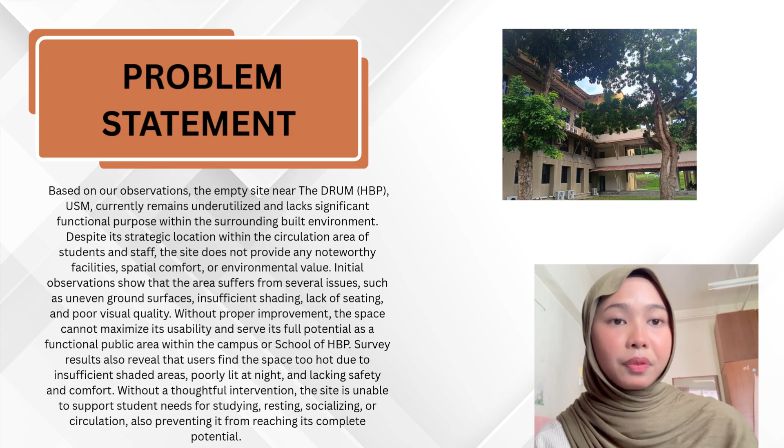This study aims to comprehensively assess the existing physical and environmental condition of the site, allowing us to understand its current state and potential. It also seeks to identify the key issues, limitations, and constraints that may affect the site's usability, comfort, and overall performance.

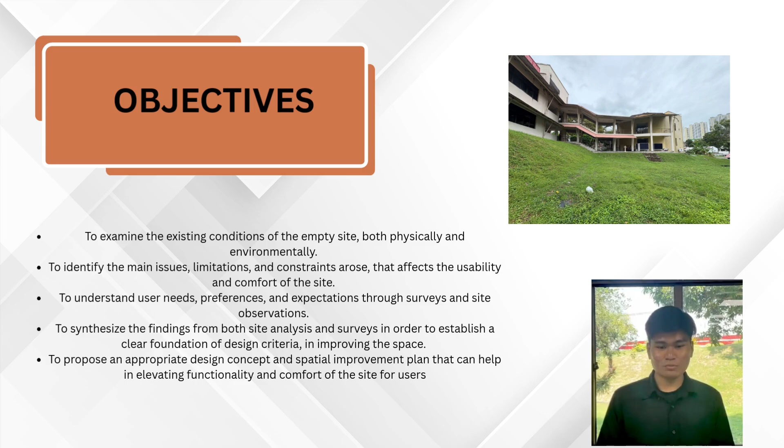In addition, the study focuses on understanding user needs, preferences, and expectations through structured surveys and detailed on-site observation. All findings are then synthesized to establish a clear and informed set of design criteria that can guide future development. Ultimately, this study proposes an appropriate design concept and spatial improvement plan intended to enhance the functionality, comfort, and overall user experience of the site.

For the preliminary site visit, we went directly to the empty lot beside the drum to get a first-hand look. During the visit, we focused on three things: first, observing the general environment and how people move, the circulation patterns.

Second, we studied the site boundaries and access points. And finally, we took actual measurements and documented all the conditions with photographs. In short, this visit gave us an evident understanding of the context and the problems we needed to address.

Next is the site inventory. We believe this site has strong potential primarily because of its strategic location. It's next to the drum and on the way to DKE48, so students pass by constantly.

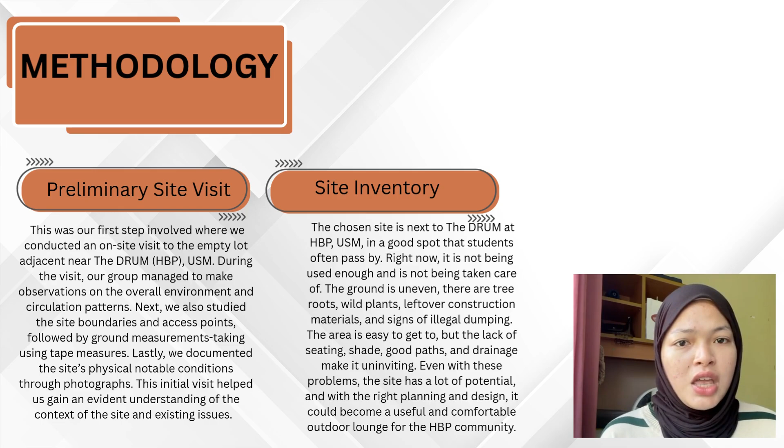However, the current physical state is challenging. We found the ground is uneven and sloping, and the roots from two large trees made the surface unstable. The construction site is located next to the drum area and DKE48 within the School of Housing, Building and Planning, HBP USM.

The terrain is uneven and hilly, creating challenges for construction activities. Two large trees with extensive root systems further disturb the ground surface, reducing usable space and affecting site stability. This site has also become an illegal dumping area, requiring cleanup before construction can begin. Additionally, several damaged items left in the middle of the site contribute to uneven ground conditions.

As for the site analysis, the strength of this space is, first, the strategic location allows students from the School of Housing, Building and Planning as well as students from the School of Educational Studies to come and use the space. It is also located at higher ground, which is good for drainage and can prevent muddy soil.

As for the weaknesses, there is construction debris embedded into the soil which can be hard to remove. The roads are also uneven and can be slippery, which creates safety hazards to the users. For the environmental assessment, this space has a positive microclimate effect that is good for air circulation.

There are also many greeneries, such as trees, that can be good for landscaping, and the roots of the trees are good to strengthen the soil.

However, weaknesses such as slopes, soil erosion, and unmanaged waste can increase the risk of flooding, increase heat retention area, and create safety hazards. To prevent this risk, the drainage system should be improved. Heat buildup area can be minimized by proper ventilation, and regular site maintenance should be done for better waste management.

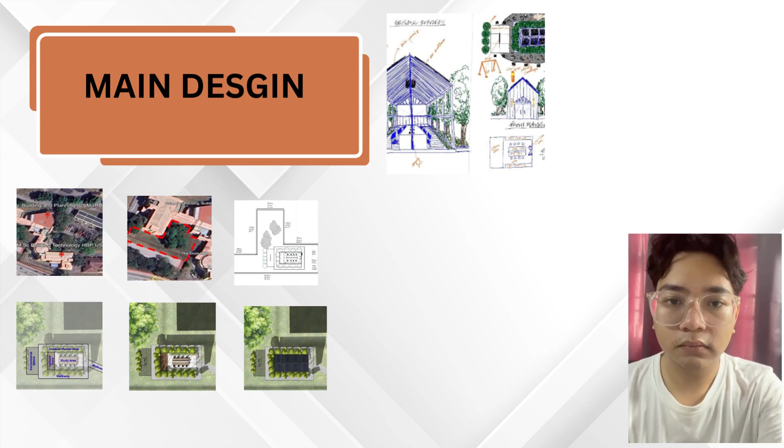Hi, I'm Ida Nakia. So now I will continue to the next part of our proposed main design concepts and elements. To begin, our main design concept is based on user needs gathered from the surveys that we conducted.

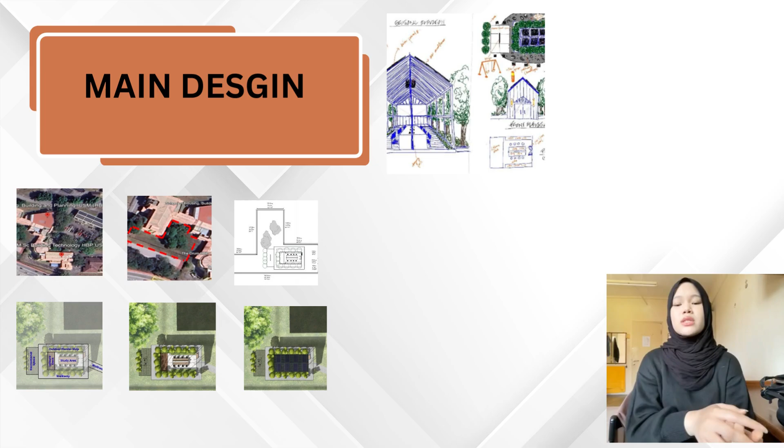It transforms this currently underutilized open space into a functional, shaded, and comfortable outdoor lounge that provides indoor-like comfort. Our air-conditioned outdoor lounge includes a raised wooden platform for relaxation, recreational swings, and landscaped green areas that could also serve as a buffer zone to promote serenity, creating a multifunctional space for studying, group discussions, resting, and social interaction.

Meanwhile, defined pathways improve connectivity between the drum block and surrounding facilities, making the space an intuitive part of the campus flow. Shaded structures with roof-mounted solar panels provide cooling, power lighting, and charging stations while promoting sustainability. Overall, our design addresses heat, lack of seating, poor lighting, and safety concerns, creating a functional, sustainable, and user-centered space that enhances campus life.

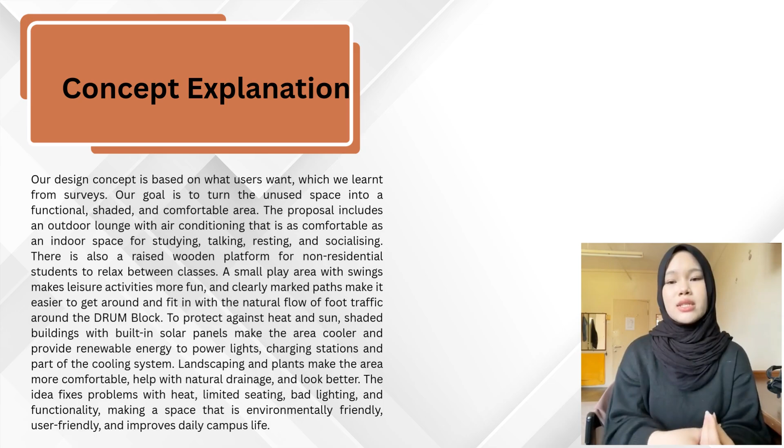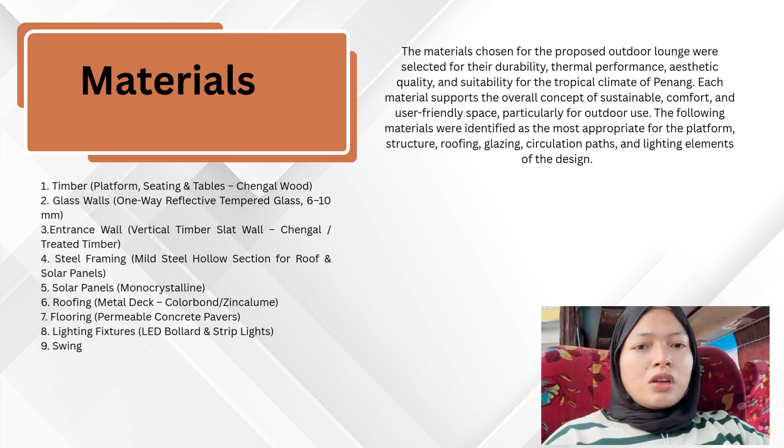Elements chosen: our design focuses on user comfort, shade, and sustainability. Comfort zones, such as seating areas based on demand, and an air-conditioned lounge for cool resting or study. Shade and energy: shaded structures combat heat dissipation and integrate solar panels for renewable power.

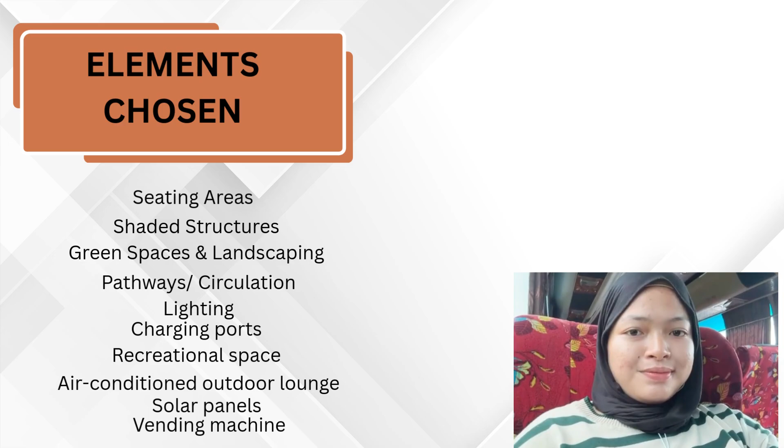Functional goods: pathway and solar LED lighting ensure safety. Charging ports and vending machines support modern student needs and long usage. These spaces improve the look and environment. The conclusion is a functional, shaded, and sustainable social study hub.

In summary, this report was able to assess the existing situation of the underutilized space around the dorm at HPP, USM, through thorough investigation, survey, and environmental study. It was found that the main concerns of this space include the lack of shading, poor comfort, lack of seating, and poor functionality.

These findings contributed to the development of a design that is human-centered. The improvement plan, which includes amenities such as air-conditioned lounge areas, elevated wooden platforms, privacy glass, solar-powered components, improved landscaping, easy circulation paths, and recreational activities, is a direct answer to the identified needs of the students. It not only optimizes the space for better functionality, but the space which is currently vacant is now a vibrant, sustainable space.